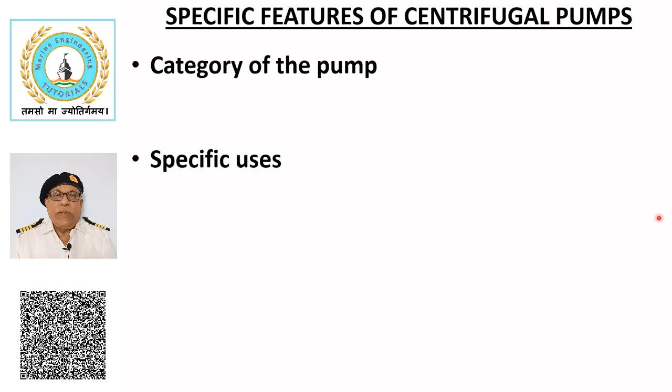Specific uses. Centrifugal pumps are used to handle low viscosity liquids. Liquids handled on ships through these pumps may include water, petroleum products, and chemicals.

Characteristics of centrifugal pumps. Centrifugal pumps provide constant flow rate and discharge pressure with respect to time. Centrifugal pump provides a constant head or pressure for a certain system because the impeller diameter is fixed and motors usually operate at constant speed.

Since the maximum pressure developed by the centrifugal pump is limited, it does not require a relief valve and is usually started with the delivery valve closed to limit the starting torque and current.

Drawbacks of centrifugal pumps: as centrifugal pumps are unable to handle vapors, they must be equipped with a priming arrangement to remove air or vapors from the suction side when expected to draw liquid from a level below the pump, especially when the liquid is volatile in nature with high vapor pressure. This problem can be eliminated if the pump is submerged in the liquid.

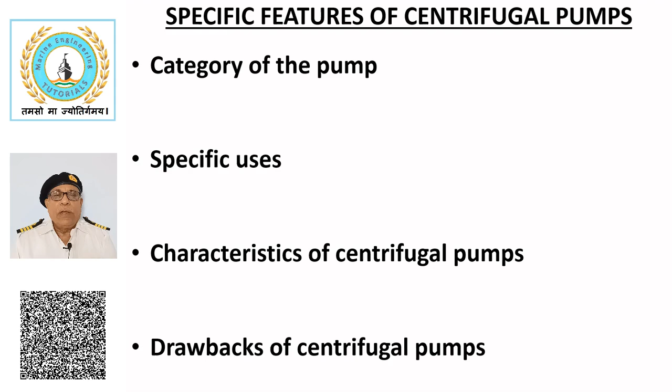Working principle of centrifugal pump. This sketch shows a schematic diagram of a centrifugal pump explaining its working principle. The centrifugal pump consists of an impeller mounted on a shaft driven by the prime mover, which can be an electric motor, a hydraulic motor, a diesel engine, or a steam turbine.

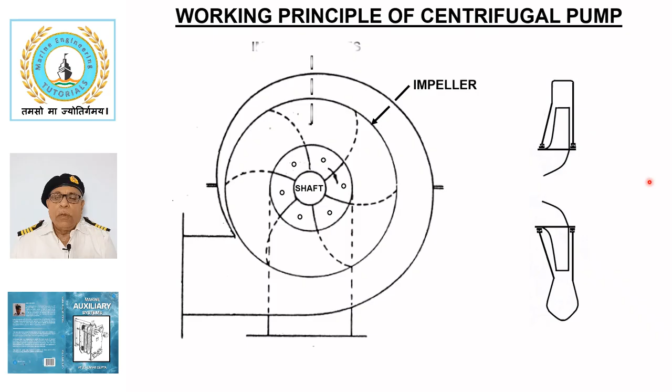The impeller has a number of vanes which displace the liquid trapped between them, thereby imparting kinetic energy to the liquid.

Liquid enters the pump through the center or eye of the impeller and flows gradually outwards between the vanes, where its velocity is increased by the impeller's rotation. Once the liquid reaches the eye, pumping begins and continues as long as the required net positive suction head is available.

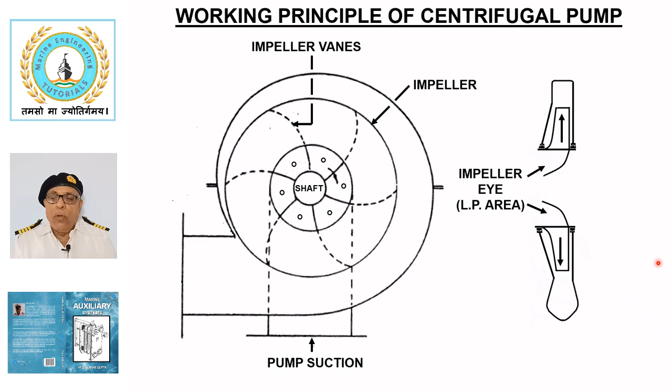As the liquid is discharged, a partial vacuum is created at the impeller eye, inducing more liquid to flow in and fill the space left by the outgoing liquid.

A diffuser or volute casing is used to convert most of the kinetic energy imparted to the liquid into pressure energy.

To restrict internal leakage from high pressure side to low pressure side, a minimum clearance between the impeller and casing is maintained by wear rings on both the low and high pressure sides, which improves pump efficiency.

To balance the thrust caused by the pressure difference on either side, equalizing holes are provided at the impeller eye. These allow the liquid leaking to the back side to return to the inlet side, thereby balancing the thrust.

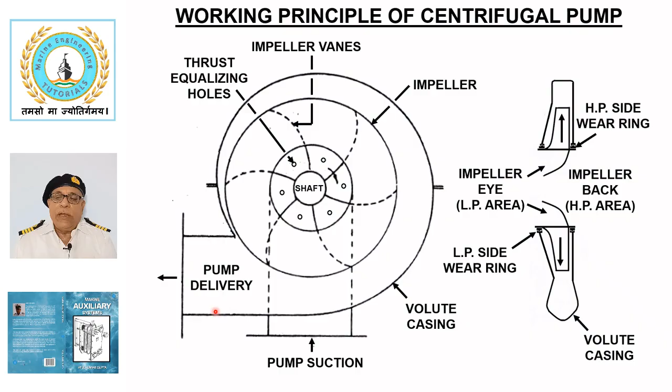The liquid is finally discharged from the pump delivery connection.

General layout of centrifugal pump. This sketch shows the general layout of a centrifugal pump, which may be mounted vertically or horizontally. Vertical arrangement is more common on ships as it results in space saving.

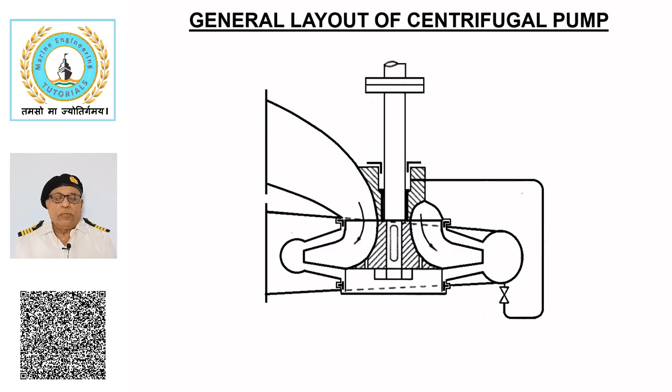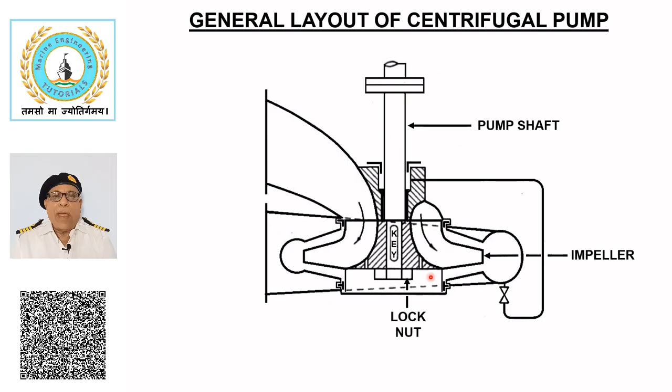It consists of an impeller mounted on the shaft, which is driven by a prime mover. The impeller is secured to the shaft with a key and lock nut. The impeller rotates inside a casing that provides passages for liquid inlet and discharge.

The upper end of the shaft is supported by the motor bearing, whereas the middle part is supported by the line bearing, which maintains the required clearance between the rotating impeller and the stationary casing.

Wear rings maintain the required clearance between rotating impeller and stationary casing and restrict the leakage of liquid from high pressure side to low pressure side.

A number of axial holes are drilled in the impeller to equalize the pressure on the back and front side of the impeller to balance the thrust.

The drive end of the shaft is fitted with a gland to prevent liquid leakage.

The sealing arrangement, provided either by gland packing or a mechanical seal, requires a cooling liquid for lubrication and heat dissipation, which is supplied from the pump's delivery side.

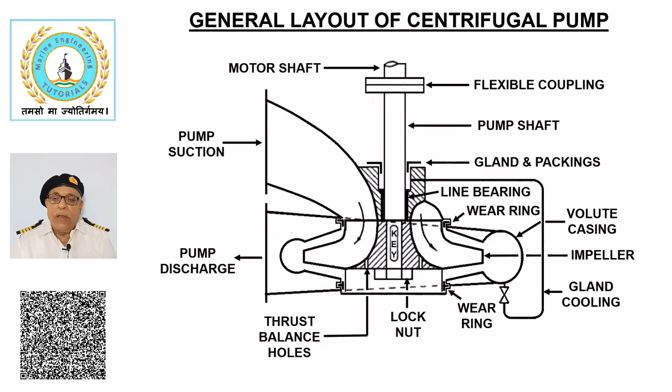The pump shaft is attached to the motor shaft with a flexible coupling, which can absorb some amount of misalignment between the two shafts. Single stage, single entry, vertical centrifugal pump.

This sketch shows the construction of a single stage, single entry, vertical centrifugal pump, which is a common arrangement on ships as it saves space.

Pump frame is built together with pump foundation and casing, equipped with suction and delivery connections.

Top cover consists of a line bearing for supporting the shaft, where the liquid being handled provides cooling and lubrication.

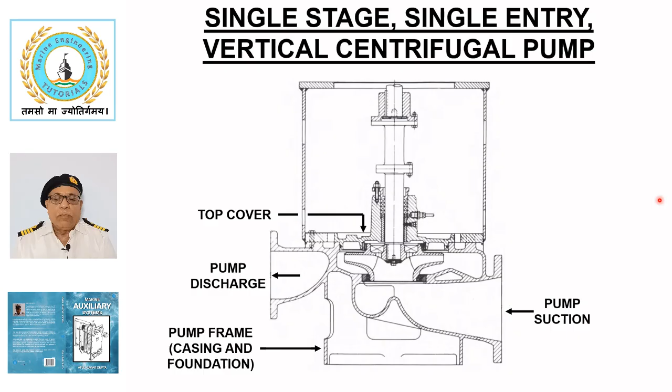Pump shaft passes through the top cover and is attached to the impeller with the help of a key and nut.

Replaceable wear rings are fitted in the pump casing and top cover to maintain the required clearance and restrict internal leakage between stationary and rotary parts from high to low pressure sides.

Gland restricts the leakage of liquid around the pump shaft, which is stopped by packing rings.

For cooling and lubrication of the gland, liquid from the high pressure side is supplied through a small connection. Most of this liquid returns back to the suction side, although a part of it is allowed to leak out.

A motor pedestal is attached to the pump casing, which houses the electric motor on its top. This arrangement simplifies the alignment between pump and motor shaft.

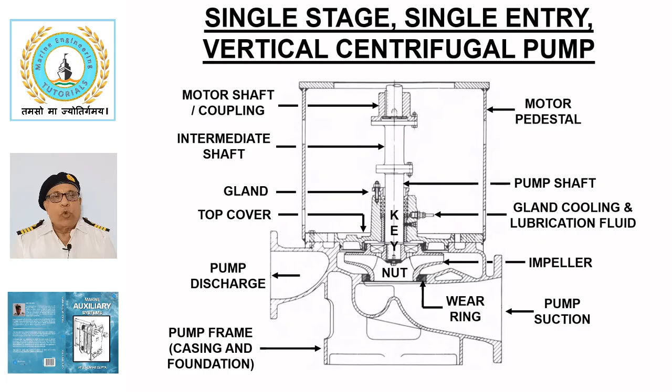Single and double entry pumps. This sketch shows minute details for the attachment of an impeller to its shaft and compares a double entry pump

with single entry, which is used where a large volume of liquid is required to be handled, as in the case of cargo oil pumps on conventional oil tankers.

In a double entry centrifugal pump, the incoming liquid enters the impeller from both sides and then flows centrally into the volute casing for discharge.

This arrangement is equivalent to having two pumps mounted side by side on the same shaft and operating in parallel.

The shaft has a step on the free end to fix the end position of the impeller.

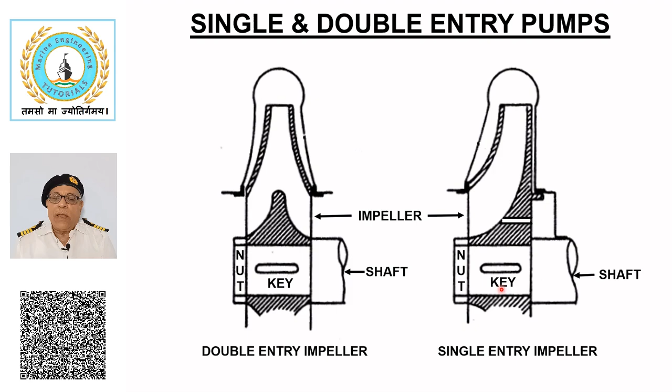The impeller is held onto the shaft with the help of a key and secured in position with a nut.

The impeller rotates in the casing and the wear rings fixed to the casing maintain a small clearance with the impeller to minimize the leakage of high pressure liquid to the low pressure side.

Impeller of single entry pump is provided with a number of equalizing holes which divert the leakage of high pressure liquid behind the impeller to the suction side for balancing the thrust.

Equalizing holes are not required in double entry impeller as inlet pressure acts on both sides.

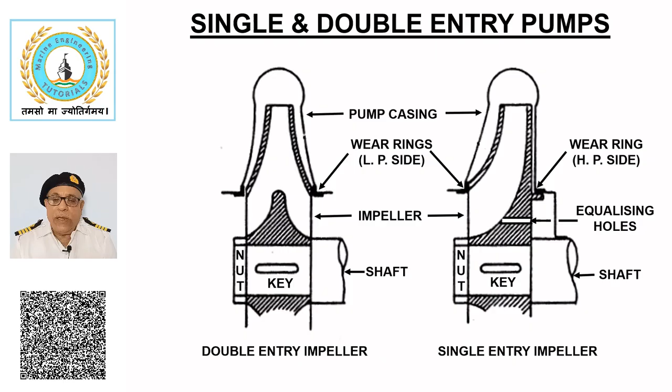The incoming liquid enters the double entry impeller from both sides and passes centrally into the volute casing for discharge.

Net positive suction head requirement. The sketch shows the relationship between the pump's net positive suction head requirement on the ordinate and flow for single and double entry pumps on the abscissa.

The curves show that the net positive suction head requirement increases gradually with flow up to the design point, after which the rise becomes very steep.

It can also be observed that a double entry pump requires lower net positive suction head in comparison to single entry pump, which is a unique advantage in poor suction conditions.

From these curves, it can be concluded that when NPSH is low, it is preferable to operate two or more pumps in parallel at lower capacity rather than operating a single pump at higher capacity by reducing RPM or throttling the discharge.

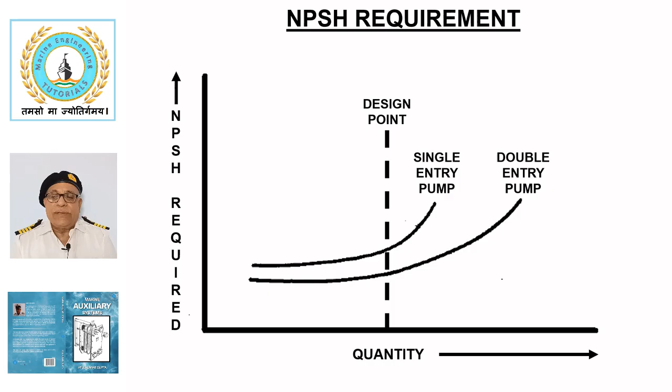This consideration is particularly important during cargo discharge operations on conventional oil tankers when the cargo tank level is low and the pump is prone to suction loss. For this reason, cargo pumps are provided with a double entry arrangement. A pump should never be operated beyond its design point, otherwise it will suffer from cavitation.

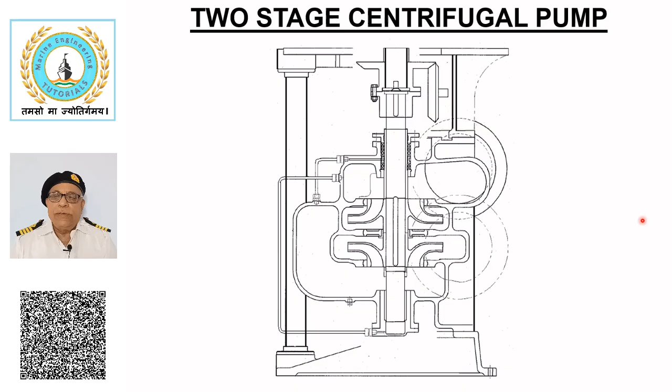Two-stage centrifugal pump. The sketch shows a two-stage centrifugal pump which is usually equipped on board as bilge, ballast, fire and general service pump.

It also carries an attached vacuum pump for priming when used for bilge and ballast service. The pump consists of two impellers which usually work in series such that discharge of first impeller goes to the suction of the second, with the purpose to increase the discharge pressure progressively.

Occasionally, these pumps are equipped with a changeover cock to use the two impellers in parallel when high capacity is desired.

In series mode, first stage impeller receives liquid from pump suction located above and delivers to the second stage. The second stage then delivers through the pump delivery from the bottom connection.

In parallel mode, both impellers draw the liquid combinedly from the pump suction and deliver combinedly to the pump's delivery.

Each impeller forms a stage and these are separated by a stage ring between the discharge of the two impellers. They have a similar function to that of the mouth rings, which are fixed in the pump casing on the suction sides. To facilitate assembly and disassembly of the pump, the casing is vertically split in two halves.

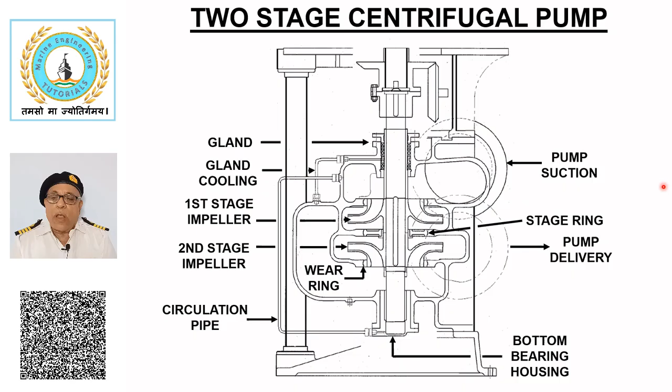The motor is fitted on the pedestal and connected to the pump with a flexible coupling. A friction clutch is provided for the operation of the vacuum pump to prime the main pump.

This completes our study about the working principle and layout of centrifugal pumps, construction and operation of single and two-stage vertical centrifugal pumps, and advantages of double entry pumps over single entry pumps, especially with respect to net positive suction head.